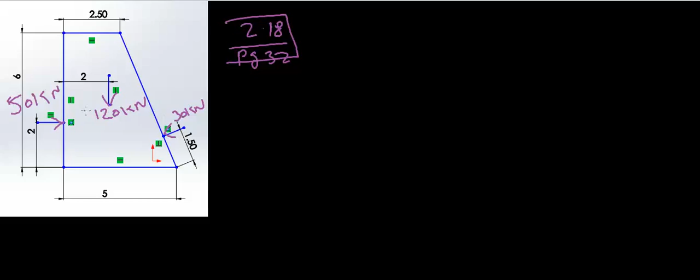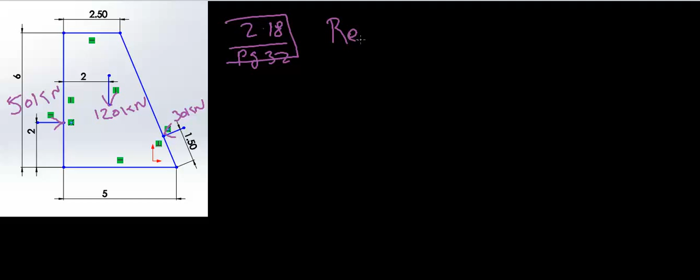So, resultant is also a force. And force means it's a vector quantity. And if it's a vector, it should have a magnitude and a direction.

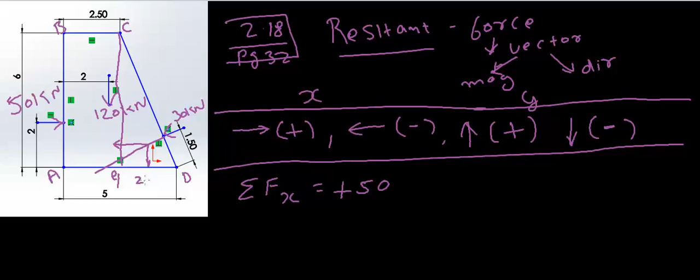Let's say this is A, this is B, this is C and this is D. So we can notice that AD is 5 meters and BC is 2.5 meters. So let's draw a straight line. Now this length is, let's say this is E. ED is equal to 2.5 meters because this 5 minus this 2.5 will give you 2.5. Alright. And this height CE will be equal to this 6 meters.

So this is 6. Now I have to find theta. So we know that if this is theta, tan theta will be equal to opposite side, which is 6, divided by the adjacent side, which is 2.5.

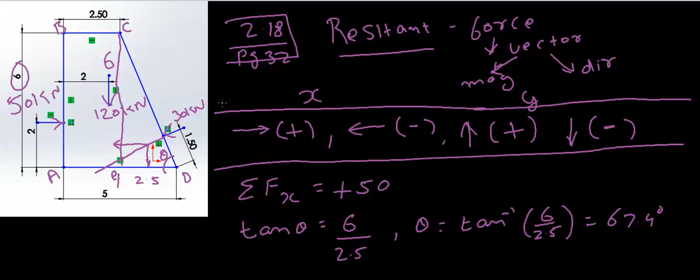So theta is equal to tan inverse of 6 divided by 2.5, which is equal to 67.4 degrees. Now if you अगर इसको हम ध्यान से देखेंगे तो this angle theta जो 67.4 degrees है is equal to this angle by similar triangles.

But what we are interested, हमेशा याद रखो हमको हमेशा ये इंटरेस्ट होता है कि मेरा जो फोर्स है वो एक्स एक्सिस से कितना एंगल बना रहा है हमेशा and it should be an acute angle because ये भी x axis है, this is x axis, so even this is an angle but we are interested in the acute angle, so this acute angle will be equal to 90 minus 67.4 which will be equal to 22.6 degrees.

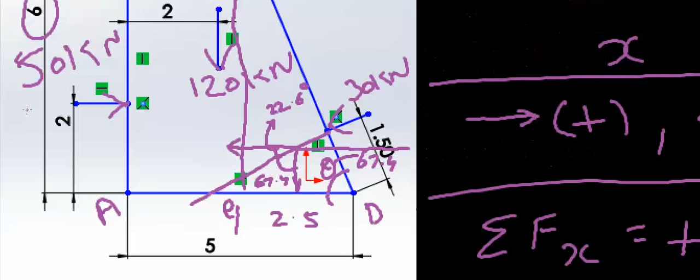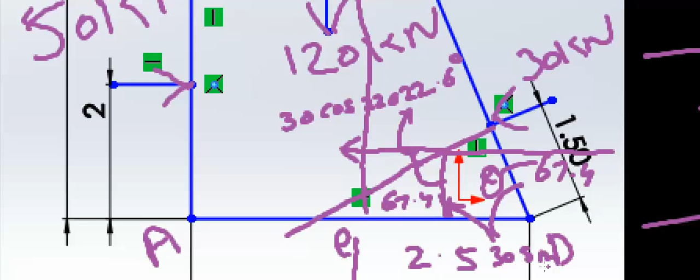Okay, so once we are done with this, now let's get back with the addition along the x direction. So first force was 50 kilonewtons and because वो right में act हो रहा था it was positive. अपना जो दूसरा force है 120 kilonewtons, it is acting along the y direction, so x direction में it is 0. अपना तीसरा force है which is 30 kilonewton, उसका x and y component जो हमने अभी निकाला will be along the x-axis 30 cos 22.6 and along the y direction 30 sin 22.6.

So along the x direction जो तीसरा फोर्स है that will be equal to 30 cos 22.6 but इसका direction जो है it is on the left hand side, so if the direction is left then the sign should be negative, so this positive will become negative. All right, so this is equal to 22.3 kilonewtons.

Similarly अभी हमें all the forces along the y direction add करने हैं, so summation of all the forces along the y direction will be equal to, now अपना जो first force है 50 kilonewton वो x axis के about act कर रहा है, so about the y direction there will be no contribution, so it will be 0. जो दूसरा force है which is 120 kilonewtons, it is acting about the y direction, so it will be 120 kilonewtons but it will be negative. Why? Because वो नीचे act हो रहा है, so this will be negative.

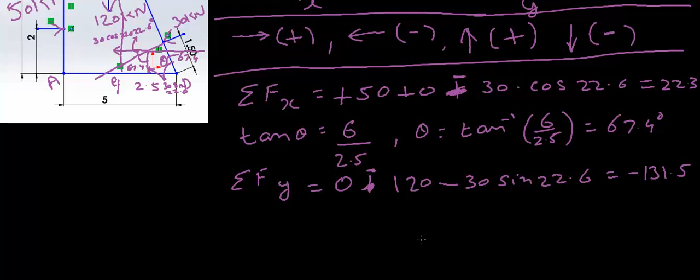So let's prove that. अपन एक drawing बनाते हैं which will be the vector summation of these two forces. Along the x direction, it's 22.3. That means it's positive. So if this is the point from where I start, 22.3 positive will be in this direction. So let's take a scale. Let's say that 1 centimeter is 10 kilonewtons. Alright.

So this is force along the x direction which is 22.3. अब मुझे ये force उसे add करना है along the y direction. So this force means that it's the force which is along the y direction because we have added all the forces along the y direction. So this force will be in y direction. या तो ये ऊपर की तरफ होगा जो यहाँ से शुरुआत करेगा या फिर ये नीचे की तरफ होगा. But as we know, अपना जो sign है that is negative, that means it is नीचे की तरफ.

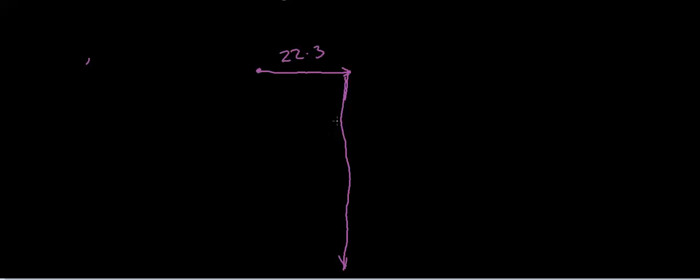When you talk about resultant, it's just the summation of these two vectors. So this is our summation of forces along x direction, and this is summation of forces along the y direction. And resultant is just a vector which, so when you add forces, it is head to tail.

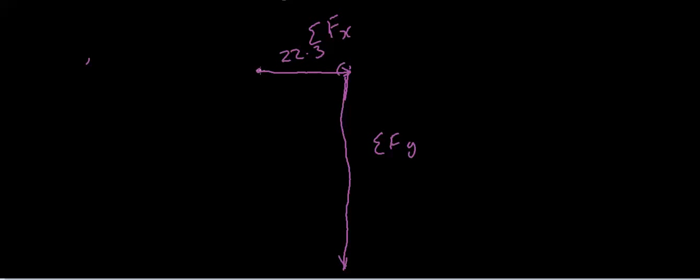यानी इसका जो head है उसको जो next force रहेगा उसका tail लगेगा. अगर और एक force है, let's say ये force, so इसका head will be connected to the next force का tail, and resultant is tail to head, so this tail to this head, ये अपना resultant है, and this is the angle that the resultant makes with x-axis.

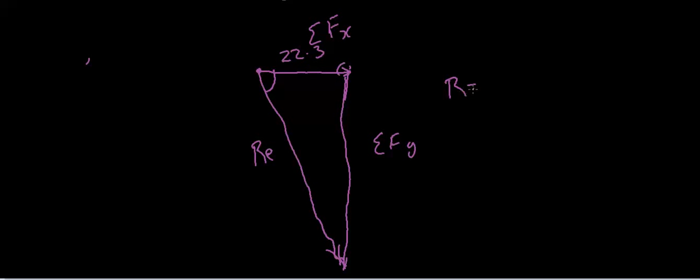So you can make out, this is just a Pythagorean theorem से तुम बोल सकते हो कि यार मेरा जो resultant है that should be equal to under root of summation of all the forces along the x direction ka square plus summation of all the forces along y direction ka square. And it makes sense. This hypotenuse will be equal to this square plus this square.

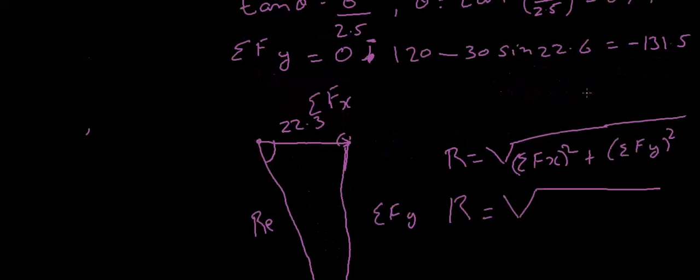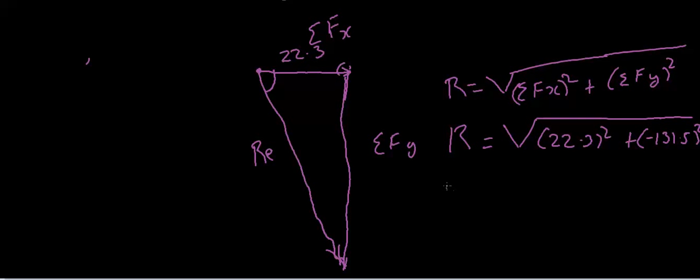सो अपना जो रिजल्टेंट आएगा दैट इज नथिंग बट अंडर रूट ऑफ summation of all the forces in x direction is 22.3 and summation of all the forces along y direction is negative 131.5. So it's 22.3 का square plus negative 131.5 का square. So the value of our resultant is equal to 133.4 kilonewtons.

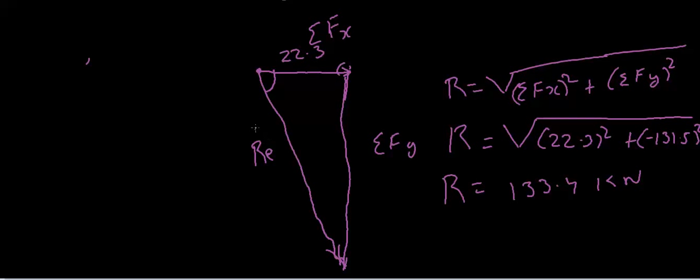अब मैं ये जानना चाहता हूँ कि what is the angle that my resultant is making with x-axis. Basically मैं direction जानना चाहता हूँ. So resultant is nothing but it's the summation of all the forces along the x direction and all the forces along the y direction. So this is how you add vectors.

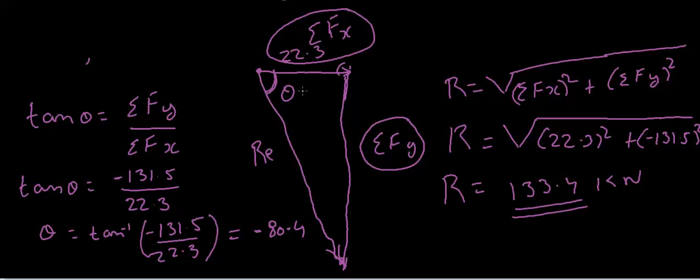Alright, so theta is equal to tan inverse of this number which is negative 131.5 divided by 22.3 which is equal to negative 80.4, and it makes sense. ये जो मेरा angle बना है, this is my x axis, so this angle is negative, so theta is negative 80.4 degrees. So अगर positive होता तो यहाँ बनता था but this is negative, so this is my 0 degree.

And when someone says कि यार it's -5, -10, -100, so I should come about this direction, so -80 is this direction. So this is how you find the resultant and the direction of the resultant.